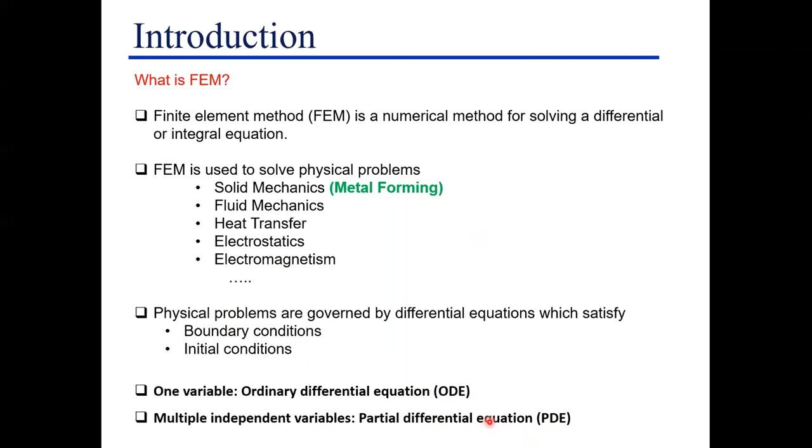Let's take an example from solid mechanics. Suppose these are beams, a system of beams, and here we need some boundary conditions. These boundary conditions along with a differential equation, called the Euler-Bernoulli beam equation. So here we need a differential equation and boundary condition, then these problems can be solved by FEM.

For example, suppose we have a rod with a variable cross-sectional area, and if you want to find the deflection at the free end, you have to solve this governing differential equation with a boundary condition, either Dirichlet or Neumann boundary conditions. We can solve this system of problems by FEM. So FEM always requires a differential equation with boundary conditions.

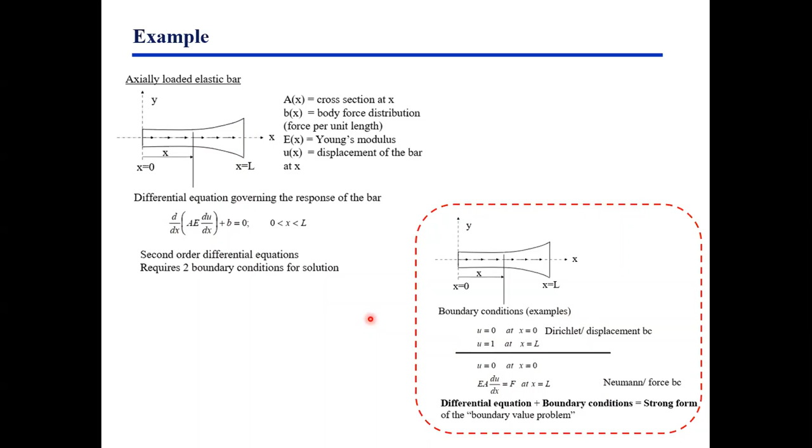Another example, suppose we have heat transfer equations. We are heating a rod at one end and interested in finding the temperature field at some point. Then from Fourier's law, we have differential equations and boundary conditions, and with the help of these boundary conditions, this differential equation is solved to find the temperatures.

So basically, the finite element method requires 6 steps: pre-processing, computing the elemental equations, assembly, applying the boundary conditions, solution, and post-processing.

The differential equations, if we have them, should be converted into elemental equations. So what is the meaning of pre-processing? The geometry is described into a number of small elements, called mesh generation. How many combination of nodes and elements, that is called mesh. So the pre-processing step is called generation of mesh.

Once you generate the mesh, then computing the elemental equations, algebraic equations are found from each element. There are 2 approaches: if the differential equation is given to us, then directly we can discretize, or direct FEM formulation is also a method to generate the algebraic equations.

Then there are a number of elements. So for assembly, you can take the number of elemental equations and add them, then apply the boundary condition, then solution, then post-processing. So these are the things.

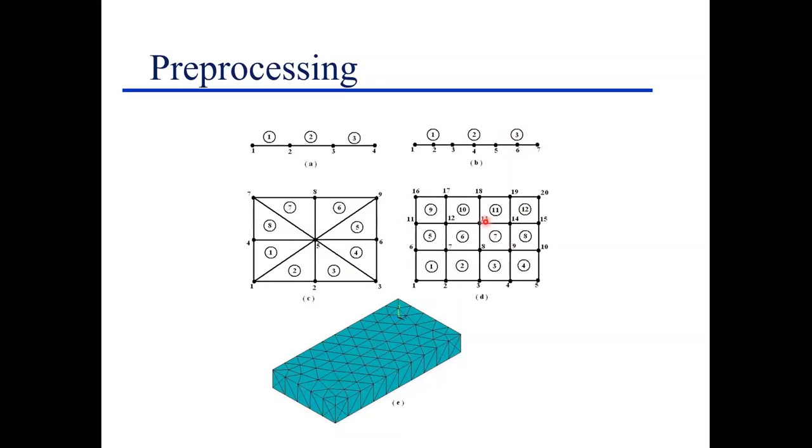In 2-dimensional, a 3-noded element is called a triangular element. And here in 2-dimensional, you can say that is a quadrilateral element because it's 4-noded. So the whole domain we have to discretize into a number of elements. This mesh is called uniform mesh because each element is uniform. And in 3-dimensional geometry, we can have a bricks element, 8-noded elements. So depending on the geometry, we can decide the elements.

Suppose we have this problem: one rod, we want to apply a load, then we're interested to find out the deflection at the free end. From strength of materials, directly you can get PL by AE, but somebody is interested to find out the deflection at an inner point.

So considering a one-dimensional problem, the whole domain is divided into 3 elements, that is 2-noded elements. So total node is 4 and 3 elements. Each element is having internal forces because Newton's third law will apply. So each force is having a tensile force as well as compressive. Based on this physics, we can develop 2 situations: one is that at each node the force acts as tensile nature, and another as compression nature.

Based on this idea, we can define these equations. First, strain, change in displacement from original displacement, that strain is converted into stress, then force. This equation can be written as a system of equations in matrix form, so we get elemental equations for the ith and jth node.

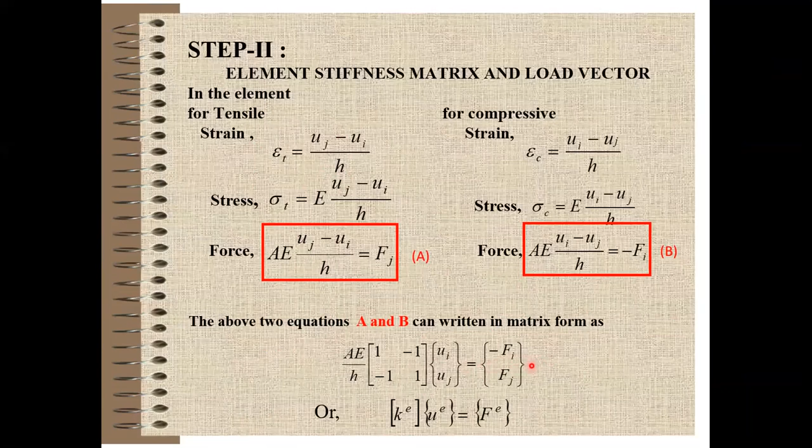In the previous problem, we divided into 3 elements. So these equations can be written for element 1, for element 2, and for element 3. Now step 3 is called assembly. We want to assemble these equations.

So how can we do this assembly? You see that we have 4 variables u1, u2, u3, u4. We can assemble these equations. This procedure is called assembly.

Once we have assembled all the elemental equations, then we can apply the boundary conditions. We know that at the fixed end, the deflection is 0, so at node u1 is equal to 0 because displacement is 0. And at node 4, we are applying a force, so F4 is equal to P. We substitute P over here, and since U1 equals 0, we perturb this, because it's an essential boundary condition.

So then we can solve this system of equations and get the nodal displacement at different points. This is the first simple process, how we go ahead with FEM. The problem here is considered as 1 degree of freedom because at each node only displacement is there.

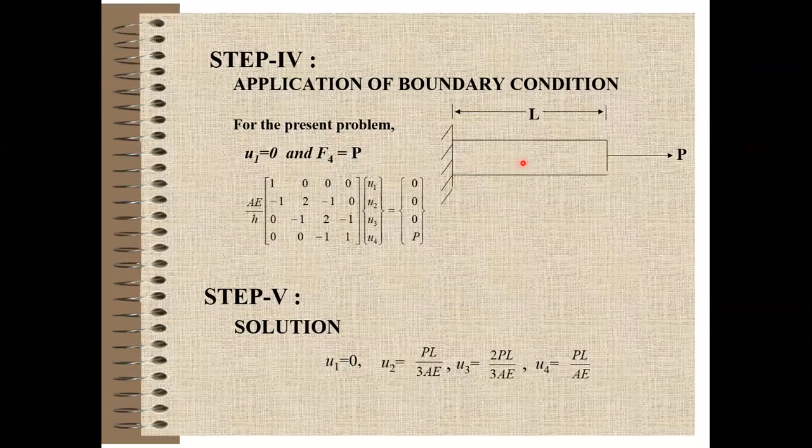If suppose then this is called post processing. Once you get a displacement, then... Sir, your voice is not audible, sir.

Now it is audible. So post processing: once displacement is got, then we find the strain, and when strain is got, by applying Hooke's law, we get the stress. This is called post processing.

So these are the 6 steps which need to be followed in the finite element method.

Suppose we take another example with a 2 degree of freedom beam, where at each node deflection as well as slope is required. This is a fixed beam. In the center, in the upward direction, we are applying a load, and we need to find out the deflection and slope at the midpoint of this beam.

In pre-processing, the whole beam is divided into a number of elements and nodes. We know that for any force in a linear elastic material, suppose this is the ith node and jth node, with a load acting, and moment and slope theta at each.

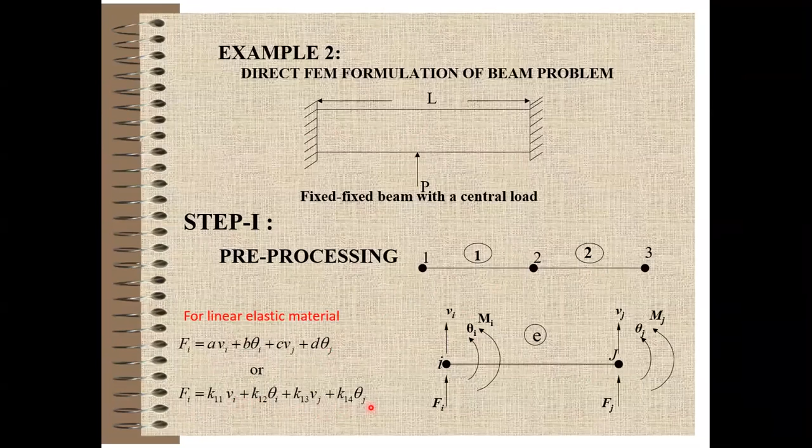So this equation, being linear, we can divide into K1 and K2 terms. Like this, Fi, Mi, Fj and Mj can be written in matrix form. Now the task is how to find out these K11, K coefficients.

Based on strength of materials relations for deflection and slope, we use these 2 equations and convert them into matrix form. Finally we get EI equal to K11, K12, K21 and K22. Similarly, the other 12 coefficients we can find out, and finally we get these equations, and this is how we obtain the stiffness matrix.

Once we obtain this, we have the global equations. We have 2 elements: for element 1 this stiffness matrix, and for element 2 this one.

Then comes assembly. Assembly means you assemble the matrices: V1 corresponds to V1 and V2 corresponds to V2. So here you see this V2, minus 12 and minus 12, and this 12, and again this 12 will come because it corresponds to V2, and in this element also this 12 corresponds to V2. So these terms will be assembled and added together.

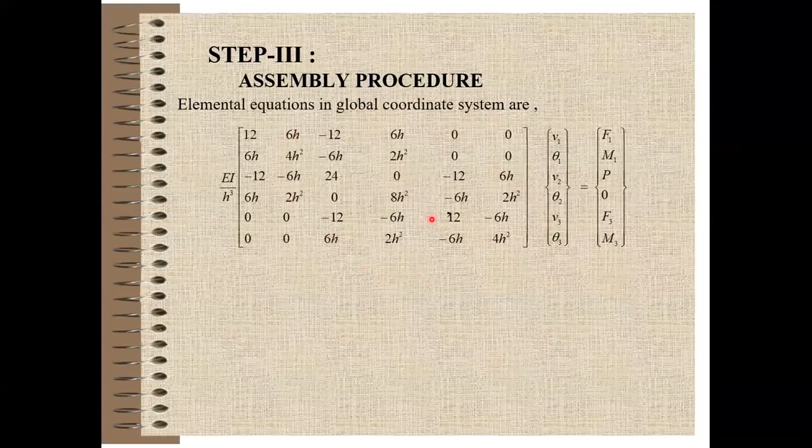Once you've done the assembly, your stiffness matrix looks like this. Then you go for applying the boundary conditions. We know this is a fixed beam, so slope and deflection at both ends are 0, meaning V1, theta1, V3, and theta3 are known, and only V2 and theta2 are unknown.

So in the previous equation, you can simplify it, and this equation reduces to this matrix. Then we can solve easily to find out V2 and theta2. This is the procedure for direct FEM methods.

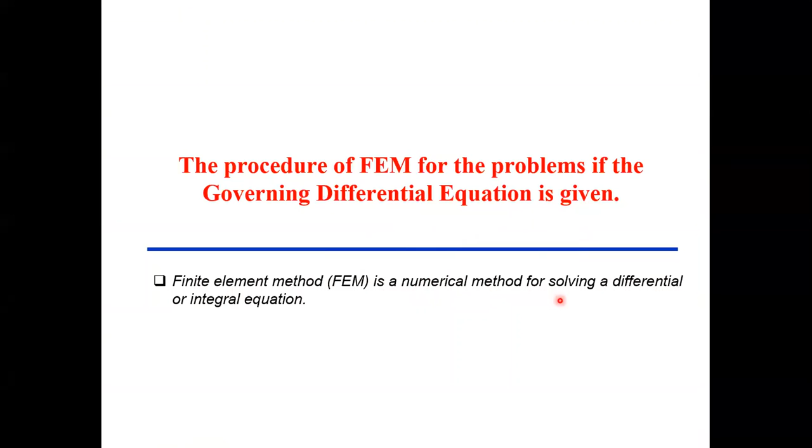Now, in this method we don't have differential equations, but whenever we follow the procedure of FEM for problems where a governing differential equation is given, we know that FEM is a numerical method for solving differential equations. So any differential equation should be converted into a variational form, which is then approximated using the finite element method. This is the basic foundation of FEM.

Now, how do we define the variational form? Let us consider this differential equation: heat conduction in a rod in one dimension, without heat generation, governed by this differential equation. In step 1, we apply this variational technique. So variational method is applied to obtain the variational form: step 1 is this, then step 2 integrate by parts, then step 3 apply the calculus of variation.

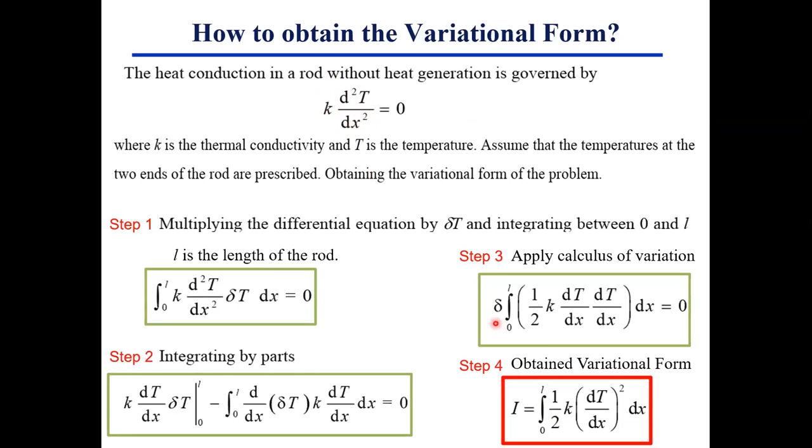Finally, you obtain the variational form in step 4. So whatever differential equation is given, we directly obtain the variational form this way, by applying the calculus of variation to get the variational form.

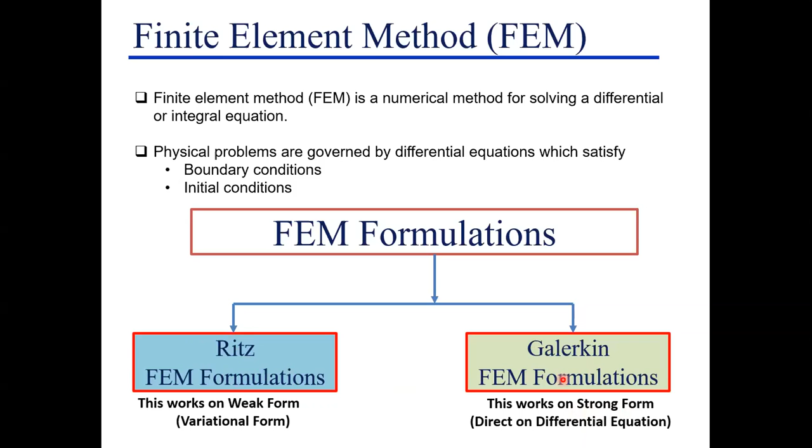In FEM formulations, there are two types: Ritz FEM formulation and Galerkin FEM formulation. Ritz formulation directly works on variational form. If a problem has a variational form, we apply Ritz FEM. If a differential equation is given and you don't want to derive the variational form, you apply Galerkin FEM. So depending on choice or simplicity, we can employ both formulations.

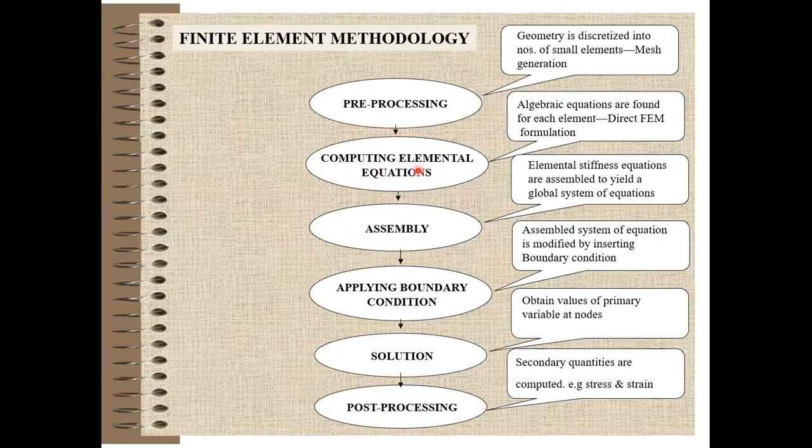These are the basic procedures followed in FEM: pre-processing, computing elemental equations, assembly, applying boundary conditions, solution, then post-processing. Here we focus on computing the elemental equation; the rest of the procedure remains the same, starting from this variational form.

Now you can express u as n1u1, n2u2, and so on for an n-noded element. Then substitute this expression into du/dx to differentiate n1, where n1 equals 1 minus x/h, so n,x equals dN/dx. Substitute these values into the variational form, then differentiate with respect to nodal values to extremize it.

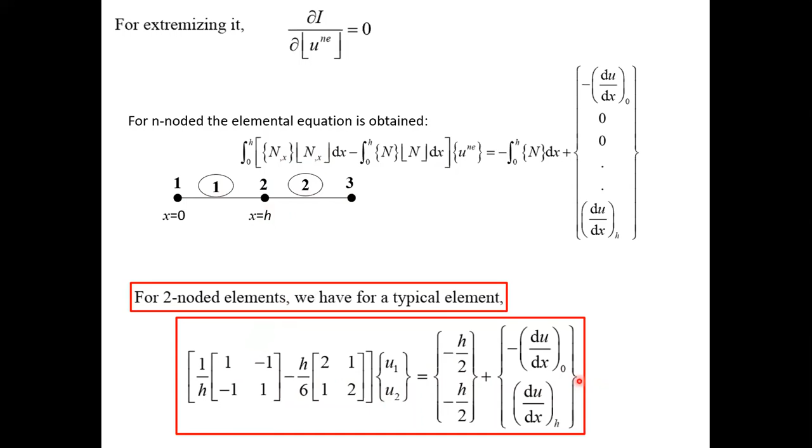Suppose you have two elements with nodes 1, 2, and 3; the problem can be divided like this, giving elemental equations for each element. Then we do assembly, apply the boundary conditions, and get a solution. Here assembly is done, then we apply the boundary condition u1 equals 0, and from the essential boundary condition we get displacements u2 and u3.

This is called Ritz FEM formulation.

What about Galerkin FEM formulation? Here the differential equation is made with RHS equal to 0, and the LHS is termed the residual. The residual is multiplied by a weight function, then integration by parts gives a weak form. Then we assume some function that has completeness based on the shape function, and then we apply the boundary conditions. This is the basic procedure for Galerkin FEM formulation.

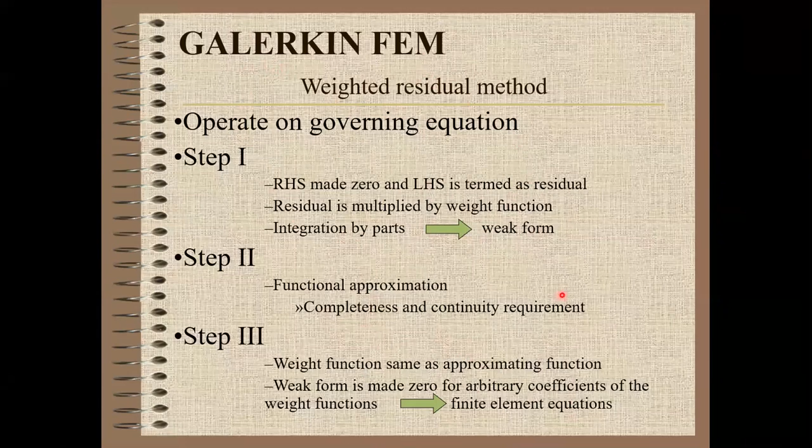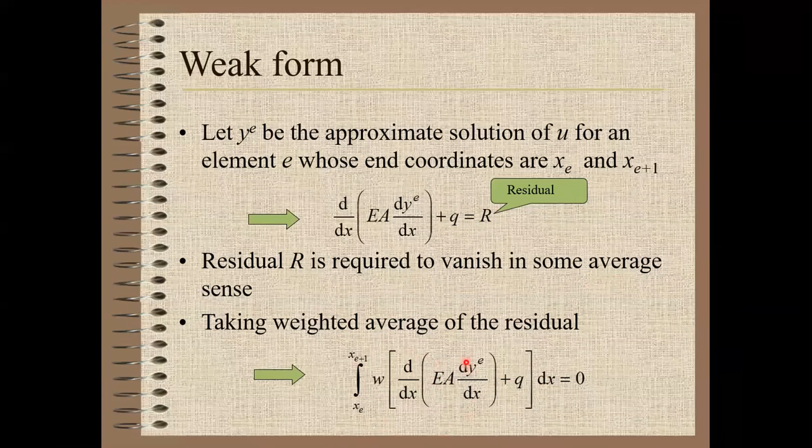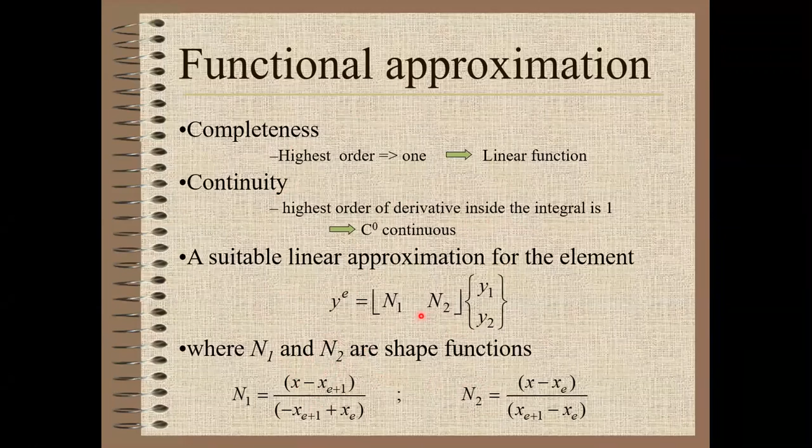We assume some function w, where w is expressed like y: y equals n1y1 plus n2y2, and similarly for w, which are called weights. We check completeness and continuity, whether the highest order derivative inside the integral is 1 or not, then put the shape functions n1 and n2. This is the approximate function, which we then substitute into the variational form.

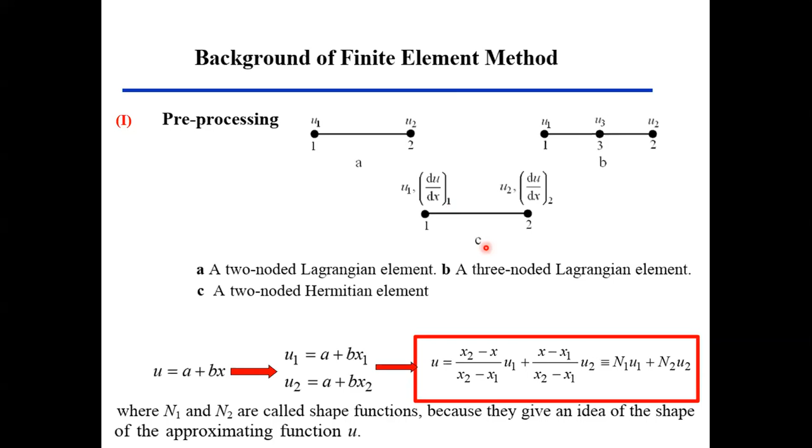Then developing the elemental equations. This is called the differential equation, and this differential equation is made into a residual in Galerkin FEM. Then assembly procedure, develop elemental equation, then assembly procedure depending on the geometry, finally you get this stiffness matrix. Then you can apply the boundary conditions, solving the system of equations. This K matrix is called stiffness matrix, applying this vector is called boundary condition, and this is nodal displacement, and we can do post processing. This is the basic requirement in FEM finite element analysis.

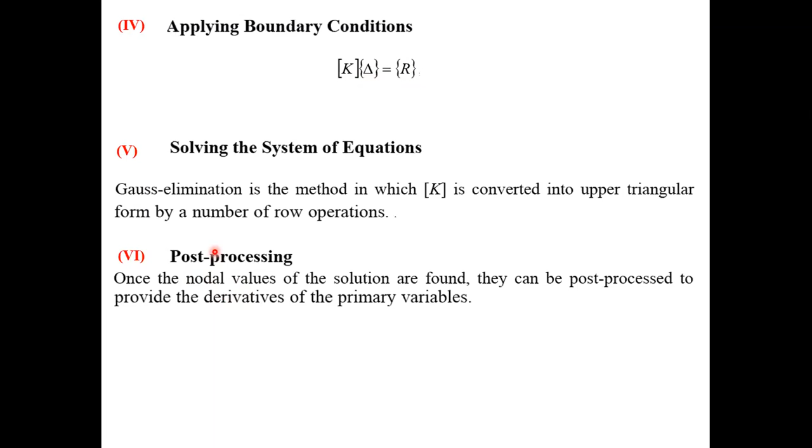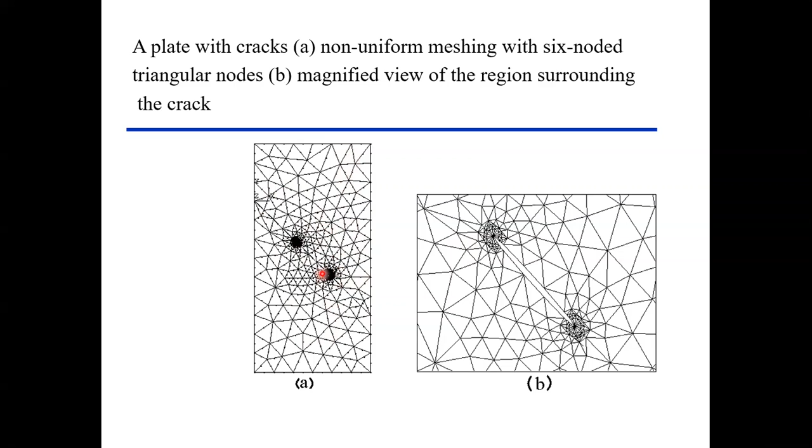And here also some crack problem is there. Suppose here this is the dot, here the coarse mesh is there, this is called fine mesh. Like that, it is fine mesh, coarse mesh element, depending on the situations.

So now come to the application of finite element analysis in metal forming processes. What are the metal forming processes? Processes that cause the change in the shape of the solid metal parts by plastic deformation, or you can say permanent deformations, are termed as metal forming processes.

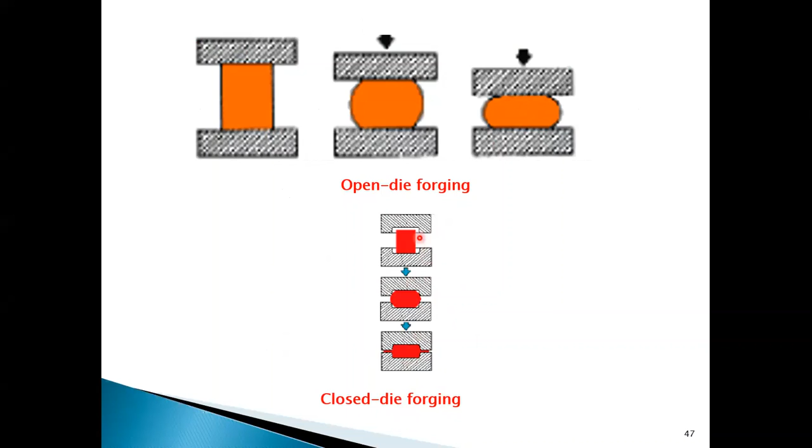You can see open die forging, where this is the material, this is the die, we can apply a load, the material is deforming. So how much stress distribution is there? Similarly, for closed die forging also, we can see like that.

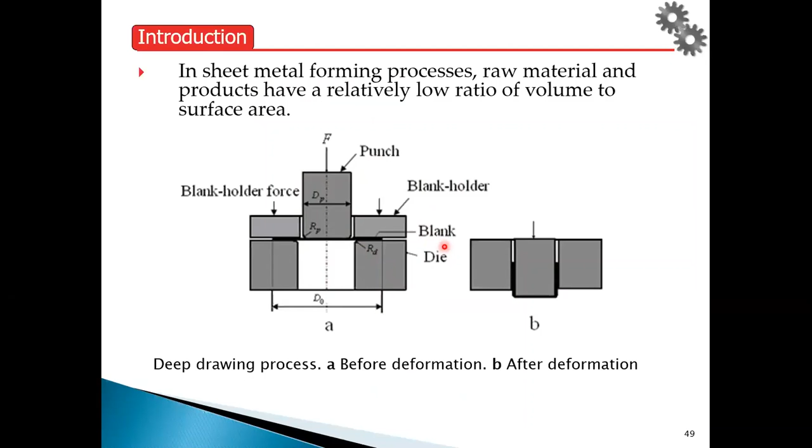So without applying mechanical forces, and without the friction effect being very much dominant, by neglecting the friction effect, this laser forming process is also very much useful, and this process is very promising to deform this sheet.

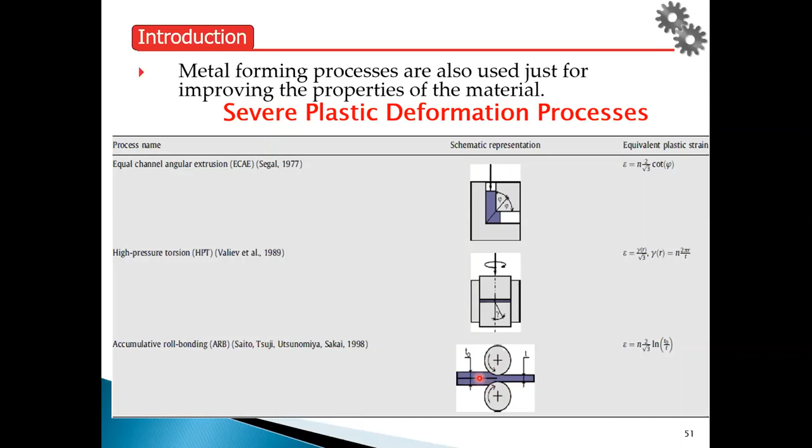By this way, the mechanical properties of the material can change, just by changing the shape and size. High pressure torsion is also one method you can apply to enhance mechanical properties. Then there's the accumulative roll bonding process, ARB process, where you take two sheets and roll them together. This also increases the mechanical properties of the sheet, so sometimes this process is also called that.

But what is the purpose of modeling of metal forming process? Why are we talking about this modeling? There are different things: power requirement, how much power is required; pressure in the die and tools, how much pressure will be required; stresses, strain distribution, strain rate distribution in the material during processing, because this is a flow formulation process. So what is the strain, how about the development of strain rate and stresses.

Then residual stress in the product. Residual stresses are those stresses where, when you apply a load and then remove the load, some stresses remain within the material, and those stresses are called residual stresses. So this plays a very important role.

Then defects - what type of defects? There are different types of defects that occur in metal forming process: geometric accuracy, surface integrity, mechanical and metallurgical properties, and microstructure. So these properties are the purpose of why we need modeling of metal forming processes.

So just pre-FEM techniques - there are 4 or 5 methods which are also useful. The slab method: in this method, we basically consider a force equilibrium approach to find out the pressure. Some slab is considered, and we apply the force equilibrium approach, developing a differential equation. This differential equation gets solved by FEM. Thereby, the slab method is also used in finite element analysis.

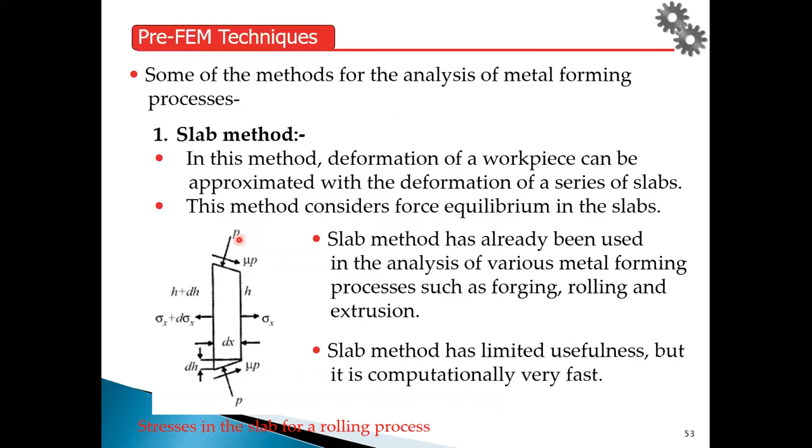Slip-line field method is also required. This method is particularly used for rigid plastic material, where the material behaves only like a rigid plastic. So when yield criteria is there - since metal forming involves plastic deformation - there are 2 criteria: one is Tresca and one is von Mises criteria.

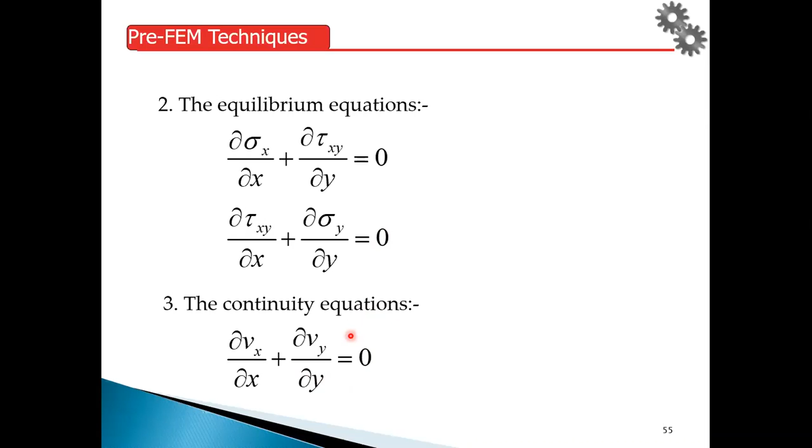This equation is satisfied, and by this equation we get the stress distribution. Then we apply the equilibrium equations, and this equilibrium equation is a differential equation. In FEM, we want this differential equation so we can solve it. And this is the continuity equation, because the volume of material remains constant in the metal forming process. So these continuity equations are there, and these are the equations we can solve using FEM.

So there are a total of 5 unknowns and we have 5 equations, so we can solve it by FEM. By applying FEM, we get a stress distribution in the metal forming process. In any forming process where the material is deforming, we get a stress and velocity field, Vx and Vy.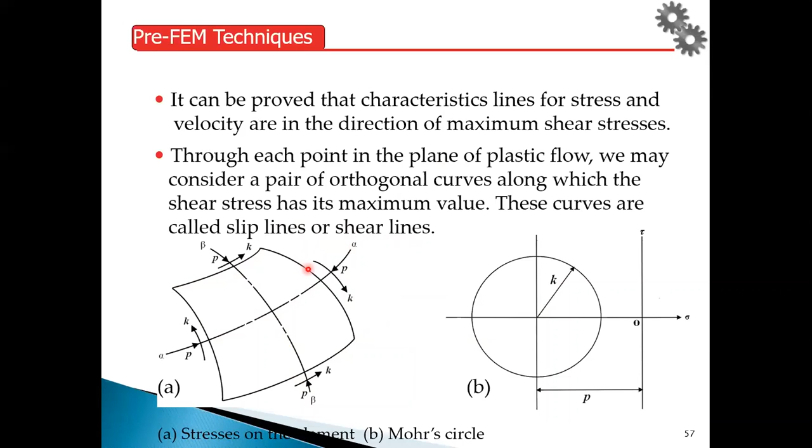This is a simple insight: in slip-line field theory, we assume some Mohr circle applies, because this method is applied for plane strain condition only. So alpha lines and beta lines are both orthogonal to how the material is behaved - the material is deforming by a shear plane. That's why they are called shear lines; the material is always deforming along a shear plane.

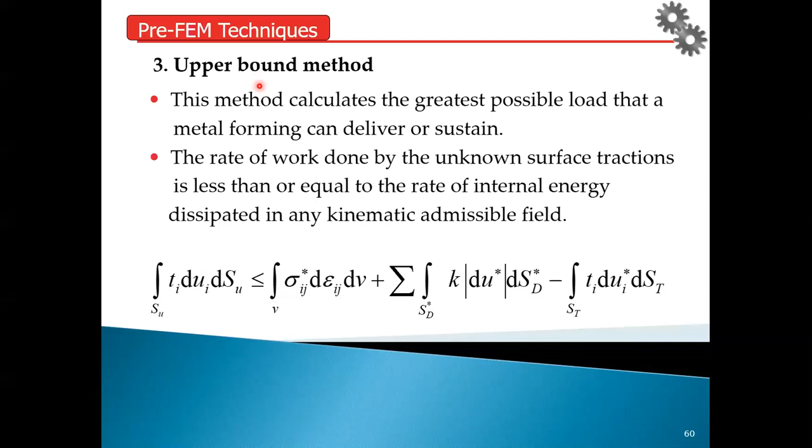Another method is called the upper bound method. Generally in the upper bound method, suppose we want to deform some material, then how much force is required? The upper bound method gives you the maximum force required based on a kinematically admissible field - the rate of work done by the unknown surface traction is less than or equal to the rate of internal energy. So the upper bound method gives you the maximum force required to deform the material.

The lower bound method is just the opposite. It says how much minimum force is required to deform the material. Meaning, if somebody says I want to deform this much material, applying the lower bound will tell you, okay, a minimum of 10 Newton force you want to apply. So the lower bound method says the minimum 10 Newton force is required for material deformation to take place. So these are the two methods, but the upper bound method is most popular in metal forming process.

Then there's also the visioplasticity method, which combines experiment and analysis both - you can find the velocity field through photographs by performing some experiments.

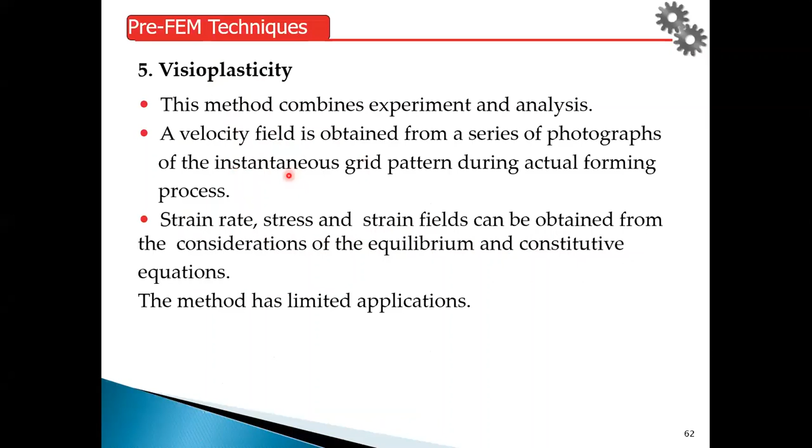Based on this information, we can find out the stress and strain field or strain rate fields from the considered equilibrium and constitutive equation. This method is called combination of experiments and theoretical, and this is also called visioplasticity.

Process dependent and material properties and different friction models. One is called Lagrangian formulation. Lagrangian formulation represents a more natural and effective approach.

Another formulation is called Eulerian formulation. Eulerian formulation is basically a constant volume process. In Eulerian formulation, for structural problems with large displacement, new control volumes have to be created because the boundaries of the solid change continuously. So the nonlinearities in the convective acceleration terms are difficult to deal with, and sometimes Lagrangian formulations are more natural to apply.

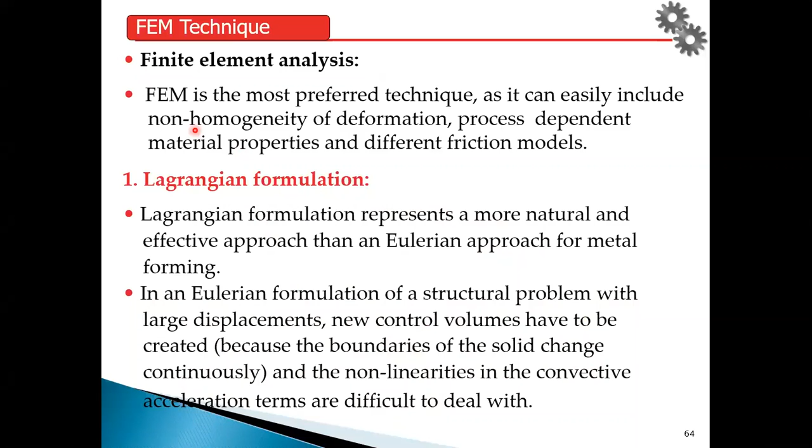Likewise, this is updated Lagrangian formulation. For example, this car is moving - we always focus that the car is moving from one distance to another. Similarly, whenever material is deforming, we always think of some particle and how this particle is moving. So in this way, updated Lagrangian formulation works.

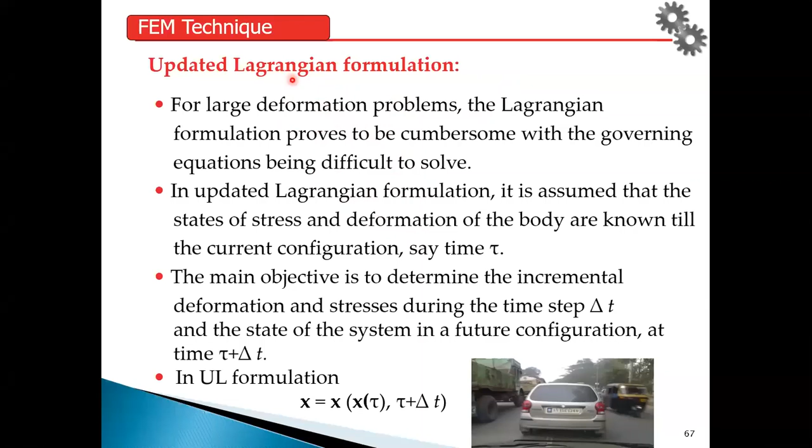But on the other hand, in Eulerian formulation, we have to focus like a bridge. We always focus on the bridge, and the bridge is static - whoever is coming on the bridge, we are not bothering about, we are just always focused on the bridge. This type of approach is used in Eulerian formulation.

In this formulation, the primary unknown variables from finite element analysis are the velocities, hydrostatic pressure at different locations called nodes, because every geometry is discretized into a number of nodes. So here this is the strain rate relation and velocity gradient, and this is the Levi-Mises plastic flow relation.

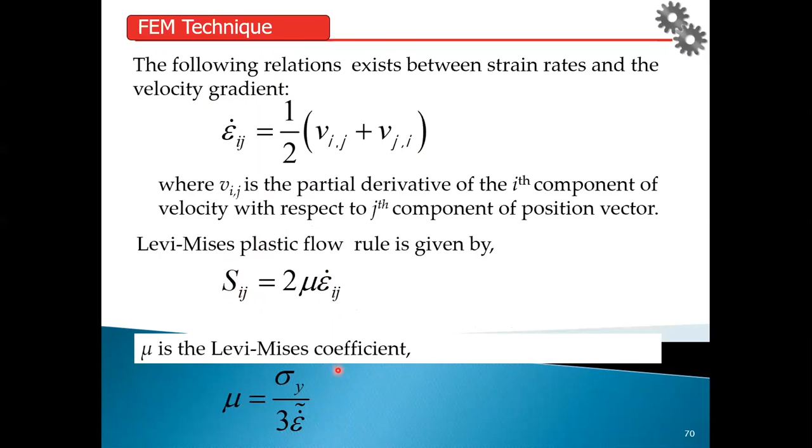Because every stress is converted into hydrostatic stress and deviatoric stresses - these are the deviatoric stresses. Then the Levi-Mises coefficient, and this is called sigma y. Sigma y, you can define by some material model - this is the flow stress, and this is how we find the equivalent strain.

Now, here are the continuity equations and equilibrium equations. This is the continuity equation, this is the equilibrium equations here, where P is the hydrostatic pressure. These equations are similar to the Navier-Stokes equation, because in fluid mechanics the fluid is flowing, and here the material is flowing. So many researchers attempt to solve these equations for different metal forming processes using Galerkin formulation.

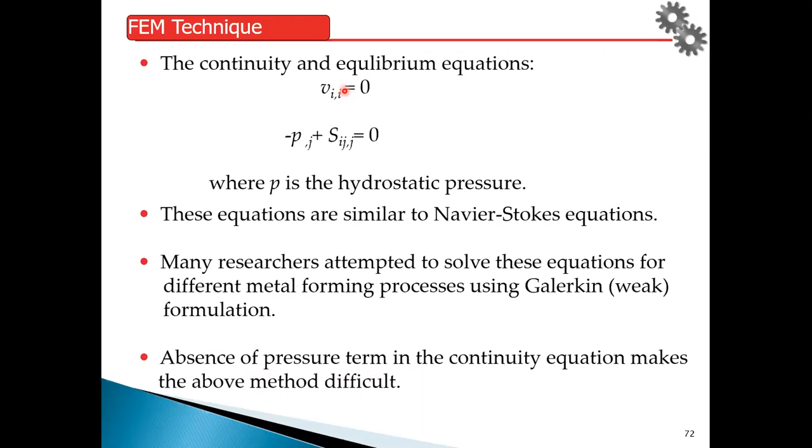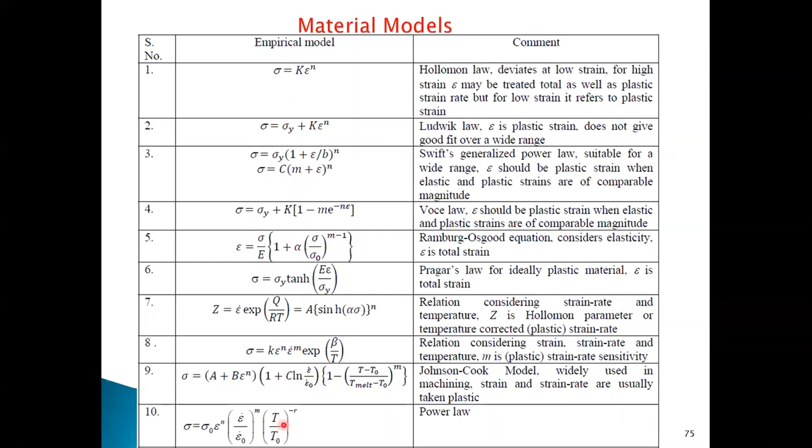So depending on our requirement, we can apply this material model in the equation. Now we want to solve this system of equations with the help of the finite element method. How can we solve it? We need a weak formulation because we are solving using Galerkin FEM formulation.

So each equation we divide and make a weak formulation, then solve it by applying it to the whole geometry. Since we are considering the strip, in this problem we are not considering the roll, only the strip is considered. This is the deformation zone CD, and here you can also see CD and E.

Due to symmetry, the upper half portion is considered, and a total of 56 elements have been taken. This geometry is divided into 4-noded quadrilateral elements. Then here a 9-noded element is taken, so we have shape functions n1, n2 up to n9. So the approximation of vx and vy, since this is a two-dimensional problem.

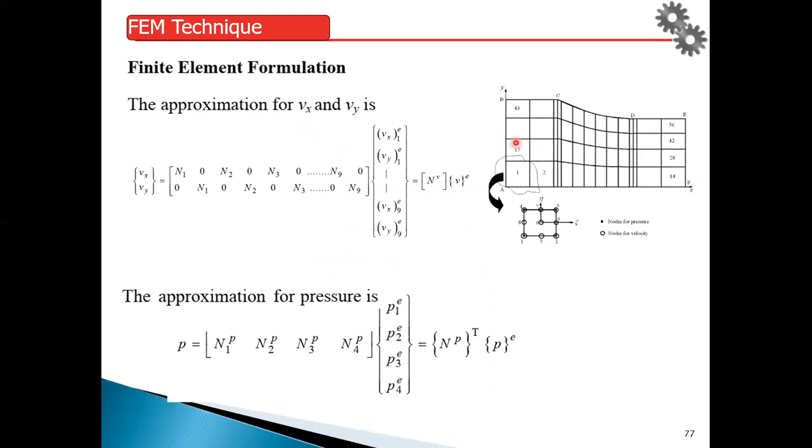vx is the velocity field in the x direction and vy is the velocity in the y direction, defined at these nodes. For pressure, we use a 4-noded element, so N1p, N2p for pressure. These are the approximate pressure and velocity formulations we considered, and we solve this problem by FEM.

On the entry AB, only velocity is moving in this steady state rolling process, so vx is equal to U1 and vy is equal to 0, because the strip is not moving in the upper direction, only moving horizontally, longitudinally. Similarly, on the exit boundary DE, vx is equal to U2 equals U1 over 1 minus r, this relation comes from the geometry of the rolling process, and vy is equal to 0.

Likewise, for the different regions AB, BC, CD, DE, EF and FA, all the boundary conditions have to be mentioned depending on the physics of the problem, and details are given in this paper. At the interface BC, the strip and roll are in contact and the strip is moving. In this figure, CD, here is BC which we represent.

Here friction is present. How can we tackle this friction? The boundary condition is vy plus vx tan phi equal to 0, where phi is the contact angle at this region. So these are the boundary conditions.

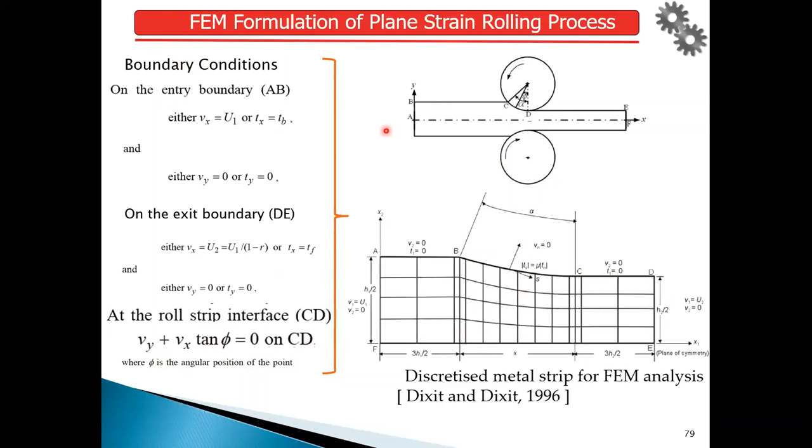We apply these differential equations and get a solution. Suppose you want to know how much roll torque is required, then power required for plastic deformation, power required for overcoming friction at the roll interface, power required due to tension, if you are applying tension, and the roll force. Once you do the FEM analysis, this is called post processing.

So nodal solutions are obtained, and then you can apply those solutions. Finally, some typical results we obtained for roll force and roll torque were compared with this paper, and the results are given, so we can obtain the roll force and roll torque. Then one important point: numerical aspects are very important.

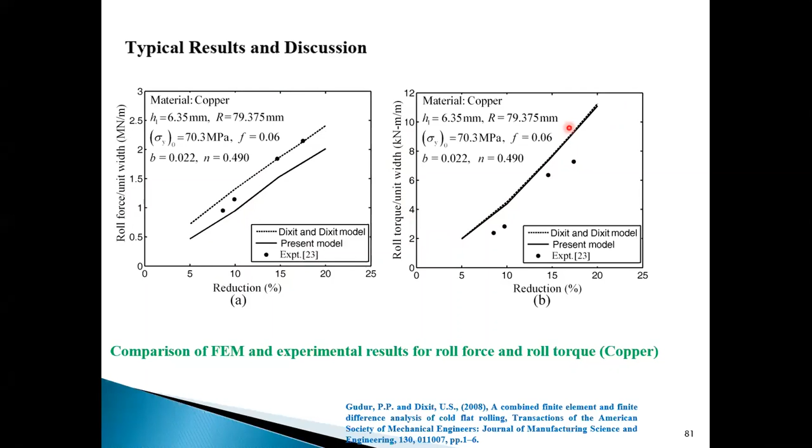Roll torque per unit width is always increasing, as in this figure. Experimentally also it is observed that when you increase the reduction, the roll torque increases in this fashion. But in this particular paper, they have reported it differently, and this is due to numerical aspects. So it is very important, when doing an FEM analysis, to consider numerical aspects carefully, otherwise your results will be wrong. This is also very important.

Once you get into the deformation zone, we get a stress distribution. This is the advantage of the FEM method. We get a deformation zone, and in this deformation zone we get stress contour plots showing the stress distribution at different strain rate contours at different regions within the deformation zone.

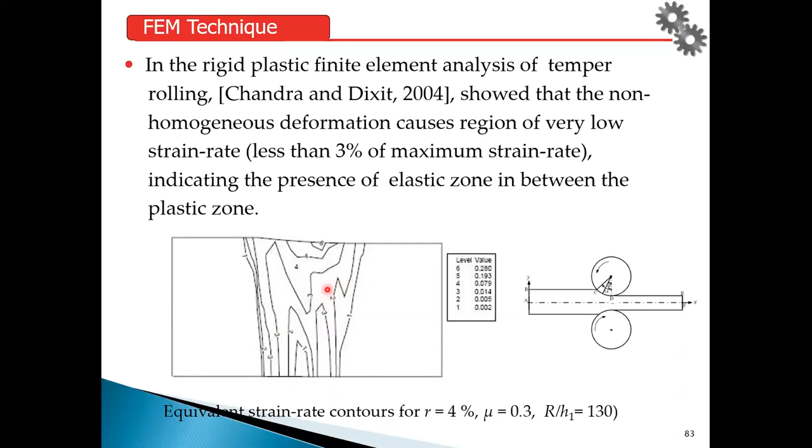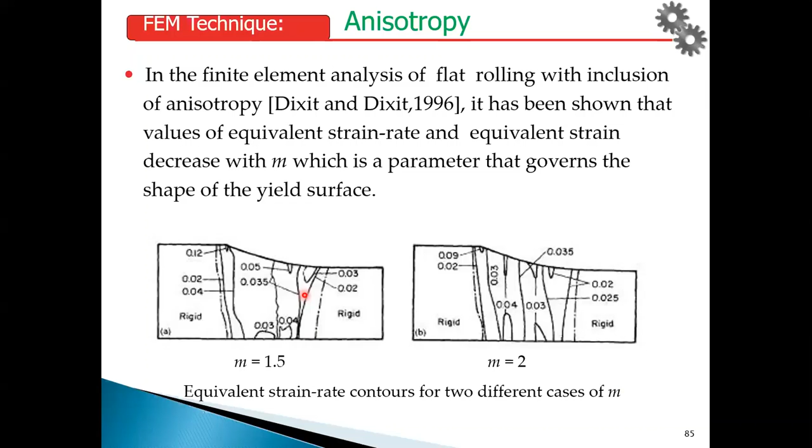Now, till now we have not talked about temperature dependency. If we include temperature dependency, we call it thermal modeling of the process. When the strip is there with the roller, due to symmetry we show only the upper part. As the material deforms, heat is generated because internal energy is converted into heat energy, and this heat hits the roll surface, creating a thermal gradient effect.

Proper thermomechanical modeling is very important when we talk about the rolling process. The deformation is based on Eulerian flow formulation, requiring a friction model, constitutive relations for flow stresses - we've seen different models - and thermal parameters like thermal conductivity and specific heat, since temperature is involved. This gives a complete overview of how we approach thermomechanical deformation using FEM, Abaqus, or analytical methods.

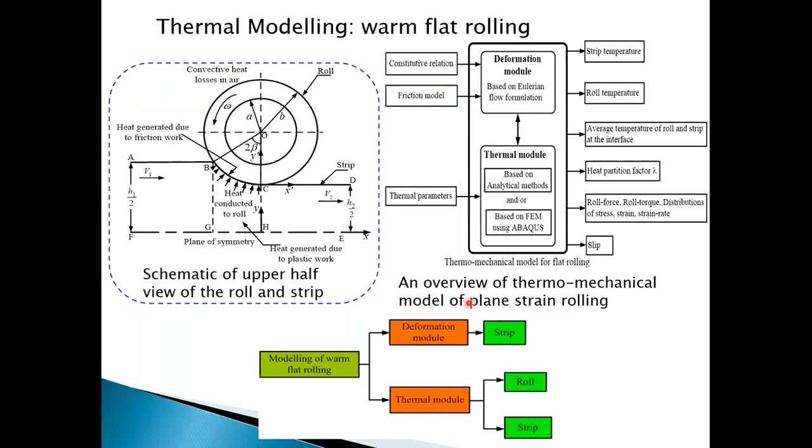Based on that, someone was also interested to find out thermal properties - how can we find these thermal properties, given that deformation is involved? There's a methodology you can find in this paper, which is part of my PhD work. The main concern is: suppose the rolling process is going on, we do thermomechanical analysis by FEM and put a temperature sensor at two locations.

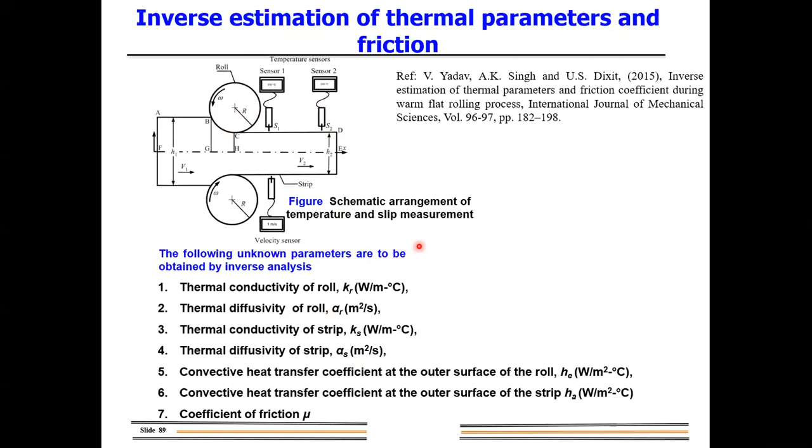Based on this temperature sensor feedback system, thermal properties can be measured without conducting experiments in a laboratory. The methodology proposed in this paper successfully demonstrates how to determine the conductivity of the roll and strip, the convective heat transfer coefficient - how much cooling occurs at the outer and inner surface of the roll, since the roll is considered hollow - and the coefficient of friction. To do this, we perform a numerical parametric study: at sensor 1 location and sensor 2 location, we observe how the temperature profile changes by varying the thermal conductivity of the roll, and then by varying alpha.

Alpha is equal to thermal diffusivity of the material. Here alpha is changing, the pattern of the temperature distribution changes when you change the thermal conductivity. This idea gives a clue that there is a unique solution, then how we can go ahead.

So we have changed thermal conductivity of a strip. You can see here, whenever strip thermal conductivity is changing, the profile is changing. But when we talk about KR, the thermal conductivity of the roll, you see over this. This is a very interesting result.

Based on these results, we have developed a methodology to find out the thermal conductivity of roll, thermal parameters, friction coefficient, without performing the experimental test. That's why modeling is very much essential, it reduces the experimental efforts.

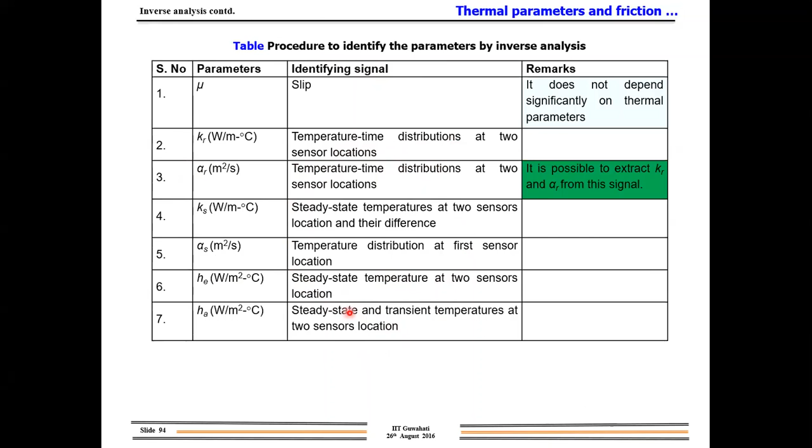So these are the results. Then based on the parametric study, we identify these parameters, this is the observation we noted. And this table will guide you to develop the feedback control system in the rolling process.

Suppose you have a direct model, that modeling, and you guess the initial value of properties, friction, and you want to perform the experiments. By performing some experiments, we want to measure the temperature and slip. By direct model also, we get some values.

So you see here, the error is measured between the computed and prescribed value. Prescribed means this is less than 1. If so, then yes, otherwise no, then update the properties using an optimization algorithm like this. This procedure is repeated, and finally we record the mechanical properties and friction, then stop. So this is the methodology which has been developed and demonstrated.

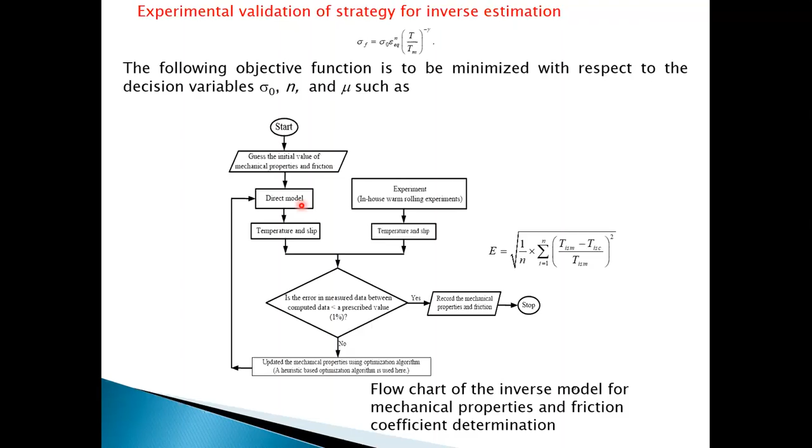Sometimes when we talk about computational time, people ask how much time is required for computation, and how we can reduce this computational time. So here some hybrid technology can be applied, some artificial neural network coupled with FEM, a trained neural network.

So the FEM model gives the velocity field, location of the neutral point, then a trained neural network NN model. The NN model provides the velocity field and it is very fast, then the FEM model finds the roll force, roll torque, etc. So this hybrid method is also useful to reduce the computational time.

I want to demonstrate, till now what we have discussed is how we can do the finite element analysis by doing coding, meaning we can do the formulation, then write the code in MATLAB or Fortran or C++, any platform, then you can get the results.

But nowadays most companies have ready-made software available that we can use, like ANSYS, you might have heard, then Abaqus. But behind Abaqus, what is going on? This mathematics is going on. But these software are mainly used via GUI, graphical user interface.

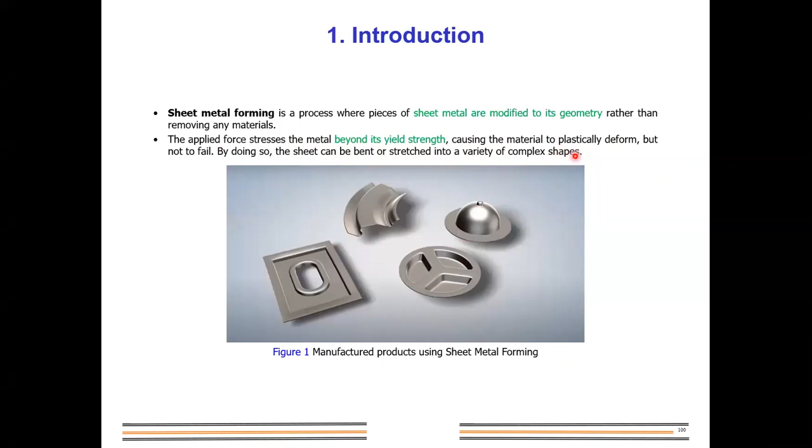The applied forces stress the metal beyond its yield strength, causing the material to plastically deform, but not fail. By doing so, the sheet can be bent or stretched into a variety of complex shapes. So in sheet metal forming, we need to go for bending, roll forming, spinning, deep drawing, stretch forming.

Suppose your metal is getting deformed into this shape. You can apply this arrangement, a process called stretch forming. Take a sheet and apply a tensile force in between, and the sheet gets stretched.

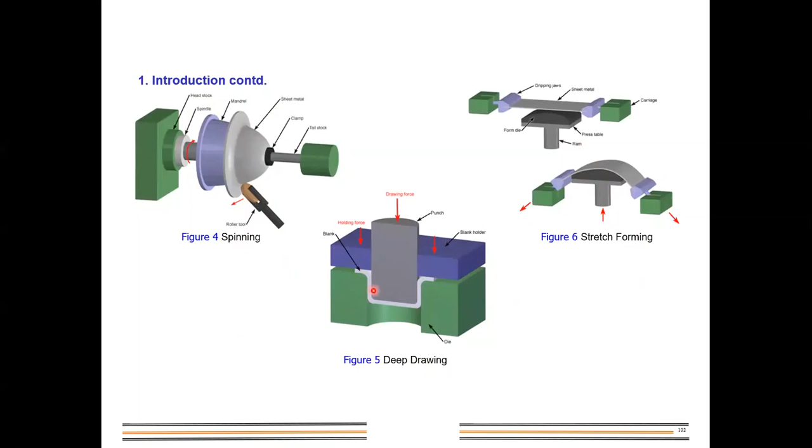In deep drawing process, we have a blank and a blank holder providing holding force. We apply a punch and this sheet will be deforming. So in this process also the sheet will be deformed. Let us take the deep drawing process.

Deep drawing is a metal forming process in which sheet metal is stretched into a desired part or shape. Here we apply forces, and different zones are there with different stresses. Stress at different locations in the deep drawing process. So how much, and where will the effect be? How can we find out?

In finite element method, this is done on Abaqus. Suppose initially you consider the sheet using these dimensions: thickness, width, length. Then this is the punch and the final shape of your sheet. We want to see this much C shape bending, for any material, say titanium material.

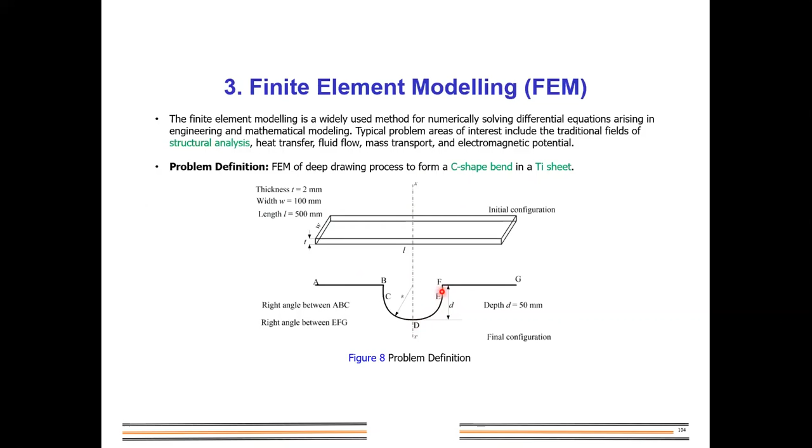Due to symmetry, only this part needs to be considered, so this part you can construct. This sheet, then punch, then blank holder you can define in Abaqus, and material model is this much. Temperature dependency can also be included, with theta, strain rate, and strain using the Johnson-Cook material model. These constants are from different papers, and we apply finite element analysis, inputting geometry and material properties, then see how this material deforms.

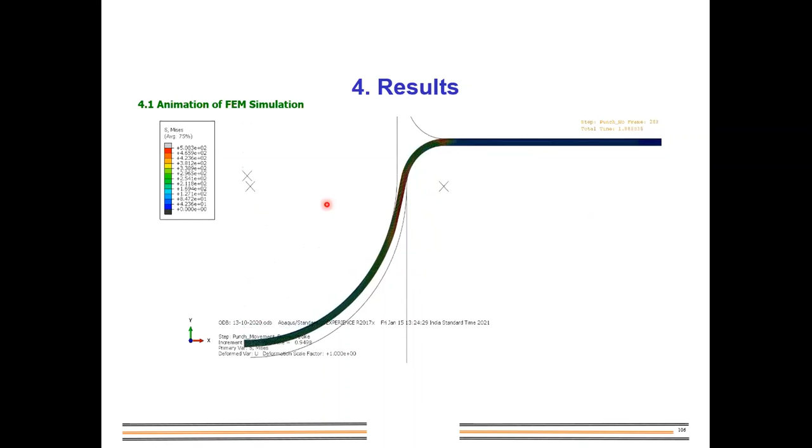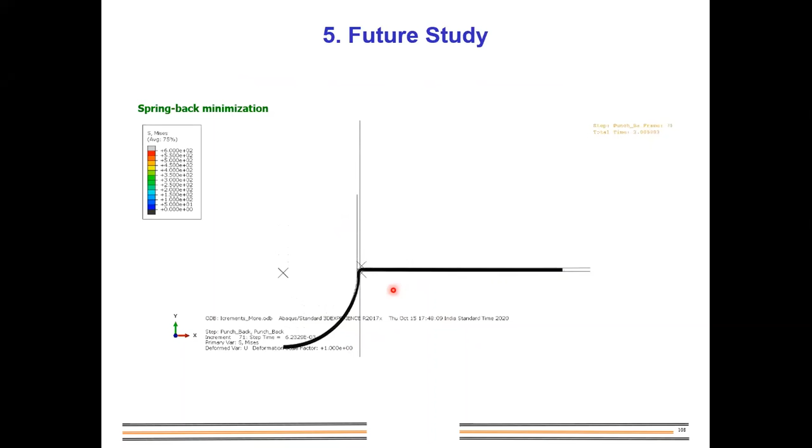One observation obtained is spring back minimization. Once you apply a load, the sheet is forming, and when you remove the load, you can see some spring back effect will be there, which should be minimized. See this much spring back effect, and likewise you can see more.

Here 3D FEM also considers the deep drawing process as 2D. So this is the deep drawing process we have done. Apply a load, and you get this shape finally.

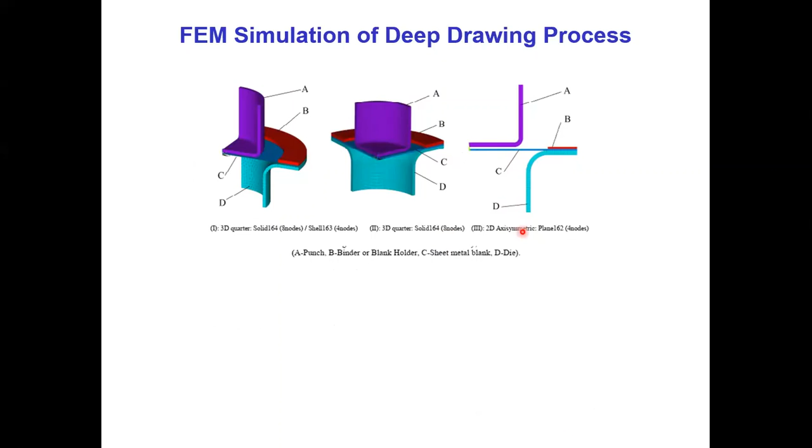In another work, we considered these geometric parameters and material properties, assuming plane strain condition. This is the sheet, this is the punch, this is the blank holder. Applying it as a 2D axisymmetric problem, this sheet, the cup part, will be deformed. You can see the stress distribution at different times and different depths, plotted as contour plots and graphs obtained by the software.

So this is the way we can do it. We don't need that much mathematics, because the mathematics part is done by software. But we want to know how to use these software techniques, so that much accuracy is also important.

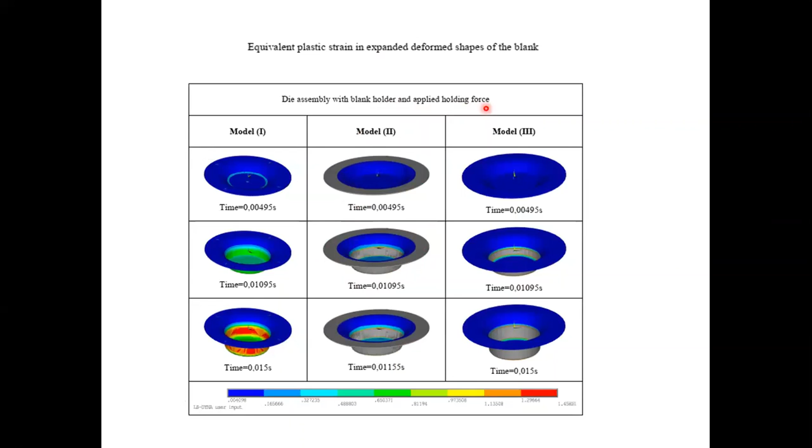See, this is another problem, equivalent to one I've taken from a paper on cup forming we have done. These are the stress distributions for the die assembly with blank holder and applied holding force at different times.

Now another part, discussed earlier, is that nowadays metal forming processes are advancing. Advanced metal forming process is called laser forming or laser bending process, because we don't want to use tool and workpiece contact, since whenever deformation occurs, the tool contacts the workpiece, causing friction. If we eliminate this friction, we can reduce forces drastically.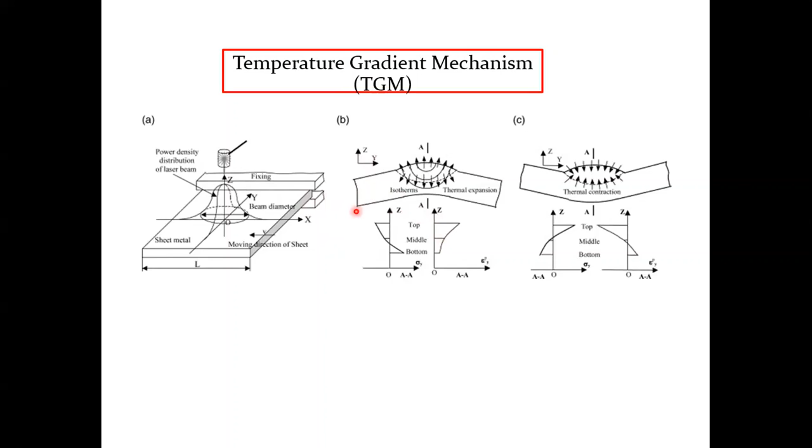But in general, in laser bending, TGM is more dominating if you select the geometric parameters such that temperature gradient mechanism takes place. Depending on the sheet - if you have a thick sheet, then upsetting mechanism occurs. If you have a large laser beam diameter, then it's a buckling mechanism. So these are the three mechanisms possible in the laser forming process.

In laser forming, the laser moves from one end to another end and you get a certain bend angle. This includes bending, forming, shortening, and thickening by laser irradiation. Tools, dies and presses are not required - this is very significant in metal forming, since conventional metal forming always requires tools and dies. But here, no - sheet plates, foils, pipes can be processed. Pipes can also be bent by applying a laser heat source. So suitable materials include metals, and also non-metals like ceramics, composites, and polymers, etc.

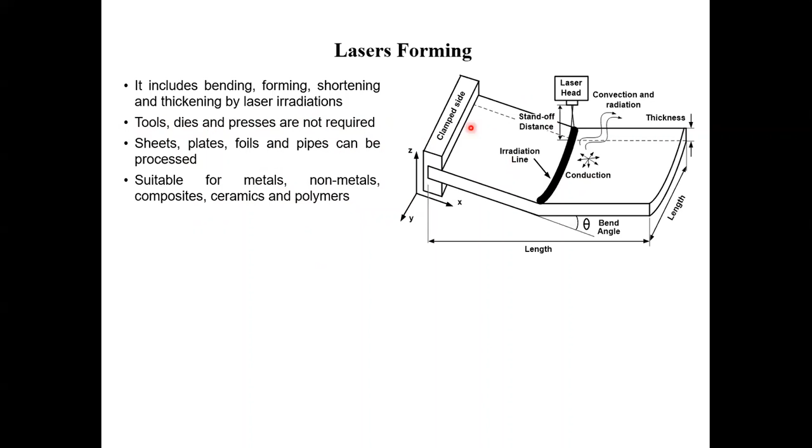The advantage is that spring back effect is not there - but we have seen in the deep drawing process that spring back effect is there, so we can minimize the spring back effect by using this process. Complex shapes can be easily formed in inaccessible areas. Accurate microforming - if you want to deform less than 1 mm, then microforming can be done. Expensive hard tooling is not required. It's energy efficient due to localized heating, gives good control, and allows processing of brittle materials. But the disadvantage is small deformation per pass, so the process is slow. So there's also a scope for how to make this process more efficient.

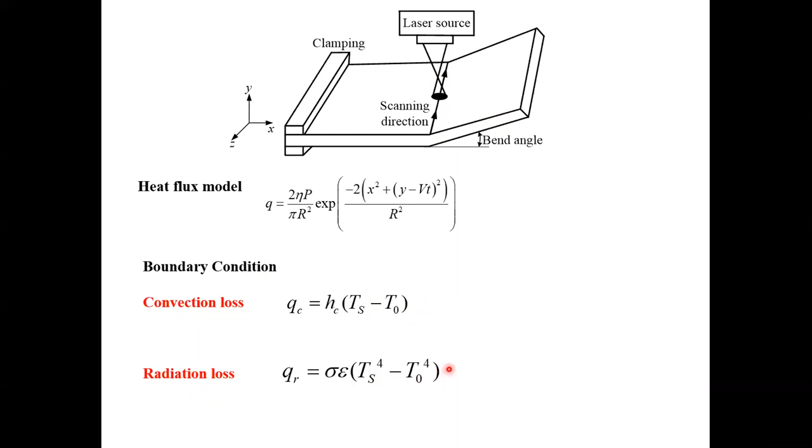Then, whenever heating occurs, cooling is also taking place. So convection loss can be accounted for by this equation, and radiation loss can be accounted for by these equations.

When you apply a load, the laser process parameters are: laser power, scan speed - at what speed the laser head will move - beam geometry, meaning the radius or diameter of the laser beam, and material parameters such as absorption coefficient, thermal properties, mechanical properties, and likewise geometry and external constraints such as clamping. These are the process parameters of laser forming and the parameters affecting the laser forming process.

Suppose this is done by ANSYS, some FEM software - this is the sheet, we can divide it into a number of elements. This is the local cylindrical coordinate system where we want to apply a heat source, and we should clamp it on one side. This is the element model, and this is the material model. For shipbuilding, material model D36 is considered, and we have given temperature-dependent properties.

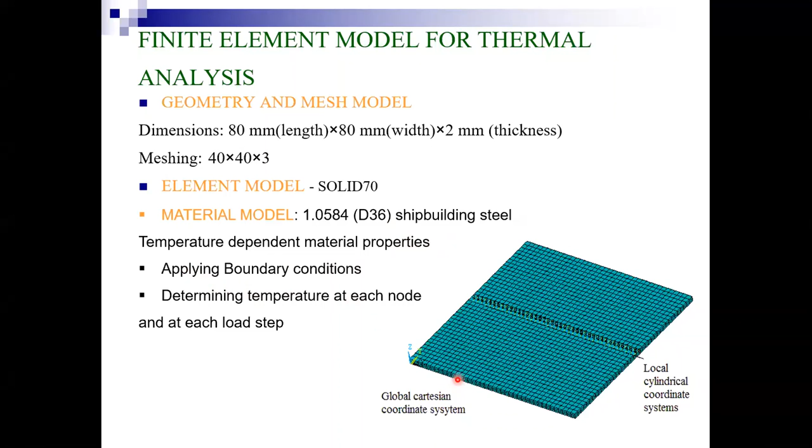Apply the boundary condition, determine the temperature at each node, and you can see over here. This is the clamp and yield criteria we consider. Then apply the heat source.

So there are things you can do with your own coding, or if you want to use software, then you have to apply these steps by steps. Then only the final results we can obtain. See, finally the sheet, the temperature we obtain, these are the sheets.

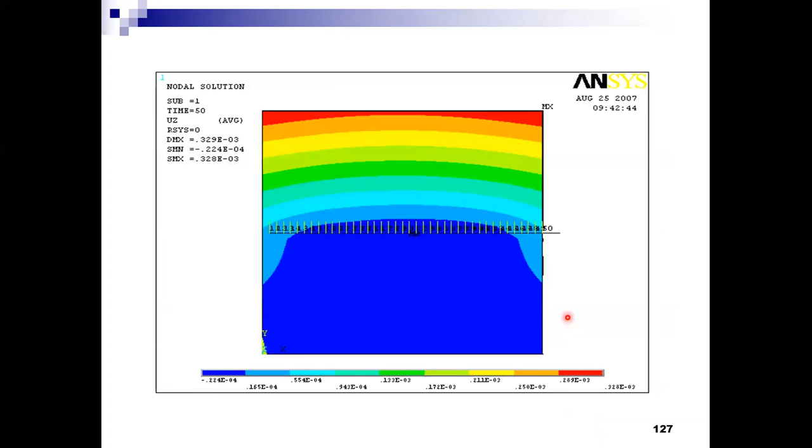This is the heat source model, and this is the displacement, the strain displacement. You see over here this sheet has got bended. Then finally, the sheet is clamped, so there is no displacement here, but the displacement is there. So this much angle we can measure, how much deformation. So each node we can measure the deflections.

So these are the laser forming process parameters: one is the energy parameter, laser power, feed rate means scanning speed, and laser beam spot diameter, number of scans. Material properties, the absorptivity means whenever you apply a heat source, how much of that heat source is converted to thermal energy. So absorptivity of the material also plays an important role. Thermal properties, then mechanical properties. So these are the things.

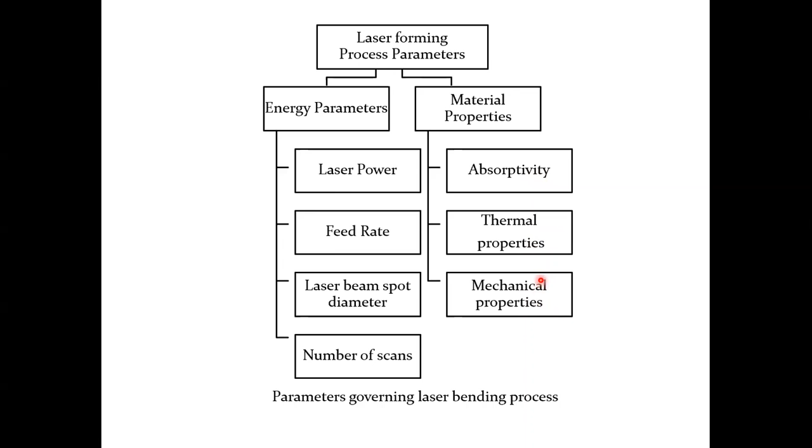Now, Abaqus is also used to analyze the deformation behavior in laser bending. The process work mainly includes the following steps: develop the geometry and define the material properties. First you define the geometry, then give the material properties, then define the boundary conditions. Then modeling of laser heat flux, which includes the heat flux intensity, beam diameter, scanning speed, and scanning path.

Then generate the appropriate mesh, then set the solution methodology. So these are the steps which are required in FEM analysis.

So here, these things we can do: thermal mechanical boundary condition, geometric modeling, material properties, given a FEM based transient thermal analysis, then find out the transient temperature distribution, then FEM based transient mechanical analysis. This process is called sequential analysis, meaning first you do the thermal, then the mechanical, then finally you get a result. If both are coupled, then you can say coupled thermomechanical analysis.

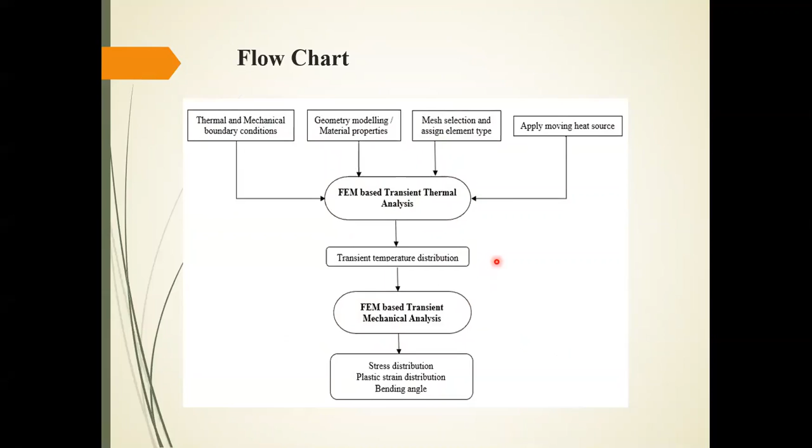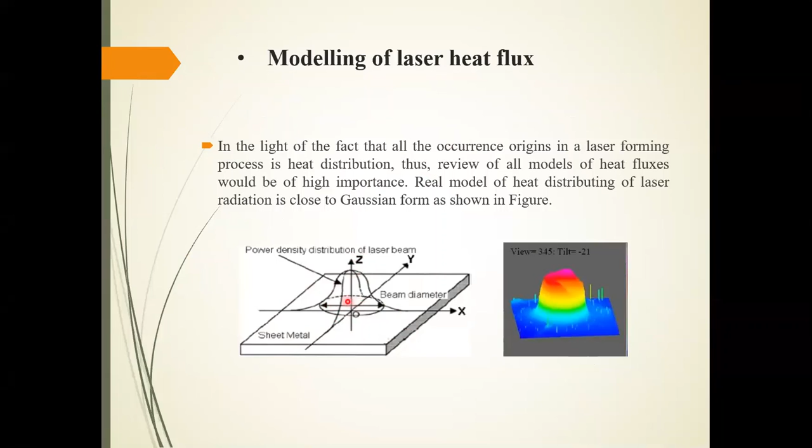So by reducing the number of elements, it directly impacts the computational time, so we can reduce it. Now, this is develop the geometry, define the mechanical properties, generate the mesh, we can mesh it, then modeling of heat flux, laser heat flux. So here Gaussian heat flux, the beam diameter, you can assume it Gaussian, then finally you get the results.

You can see over here, when the heat source is here, at this point the temperature is maximum, but when it reaches up to this region, the sheet got bended. See over here, initially no bending is taking place, but whenever the heat source moves from this point to this point, the bending is taking place. So the sheet got bended, this is what we need.

Then what about the stress distribution? Von Mises stress distribution, you get it, so this will give it. Then see, this much bending angle is there, so plastic strain will be there.

So more or less, every part you can get no plastic strain, but bending is taking place from this region only, that's why plastic strain is maximum at this region. See, but the sheet got bended, see over here, so this is the way. So it causes distortion in the scanned region, resulting in the worksheet bending, which can be observed in this picture.

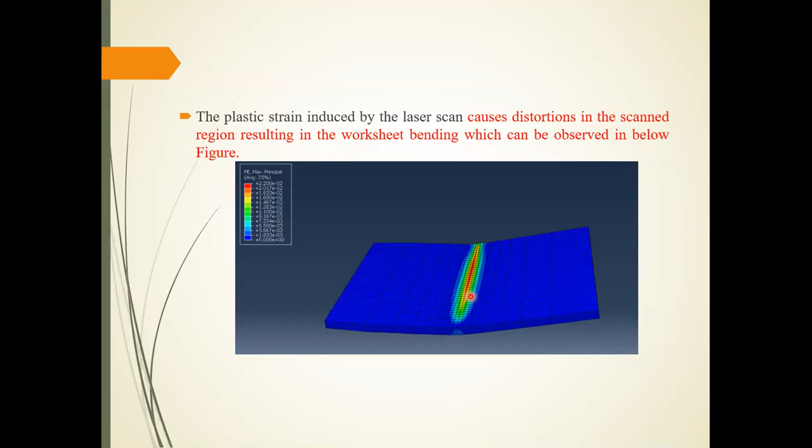Extract the figure from Abaqus or ANSYS to publish a paper. This process is also very much helpful to represent your results. So finally you get the sheet is bended. We have compared these results with experiments somebody has done, and by simulation also we get the same results.

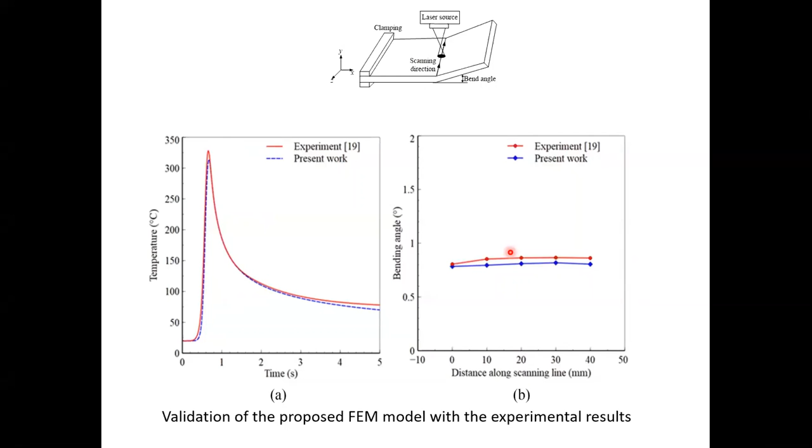So almost within 5% error we get it, which says that your simulation results are validated. Then we can do some parameter study also depending on things, and see temperature at point T1, point T, so heat source reaches here, then hits here. Corresponding, you see the sheet is also taking bending. Here no bending, here some partial bending. Finally see this temperature - these are the observations easily we can observe in the software, Abaqus. These are the results which contour plots will obtain.

So challenges and research status in laser forming: process modeling and optimization, study the metallurgical aspect. Still this area is blank - what microstructure changes take place by applying deformation?

Then study of irradiation strategies at which predefined path it is decided. Development of efficient and portable laser systems. Feedback control system also required for precise and control laser forming process. Development of coating - suppose you apply coating, then what about the material absorbability? These are the things that research people are doing.

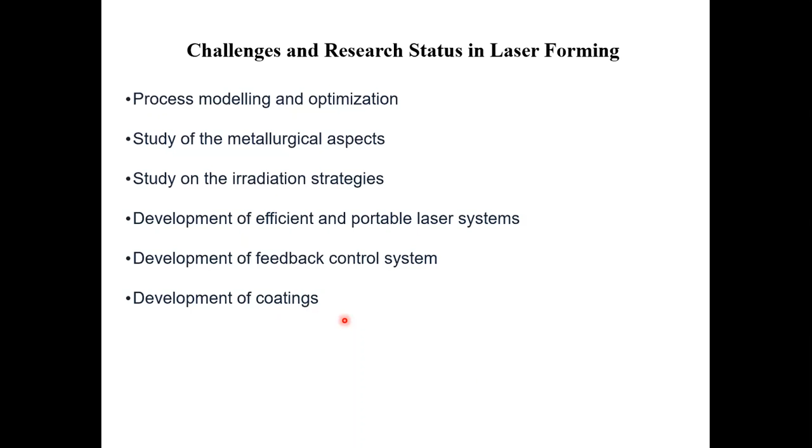And you see, this is the inverse laser bending process. Curvilinear laser bending, people have done work. Then multi-pass laser bending, people also doing laser assisted bending, means you apply a laser and apply a mechanical force. Then your results will be much better than the laser bending alone.

So forced cooling, because the heat transfer is there, then shape generation, then apply a soft computing technique, then optimization, then inverse analysis also, like in a rolling process we have discussed. Similar methodology can be employed in this process also.

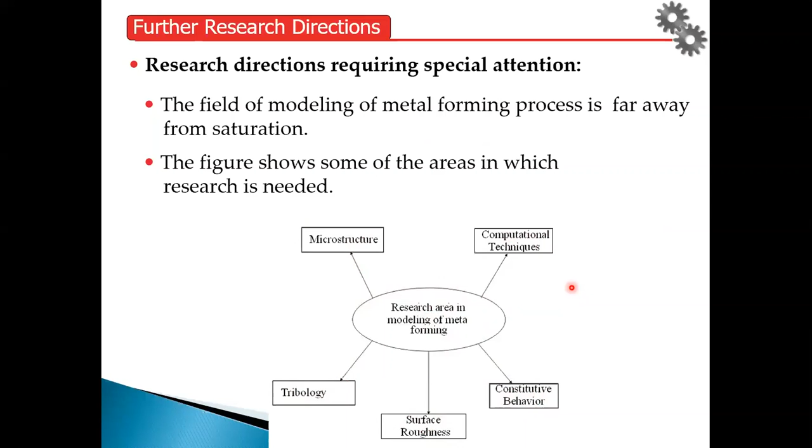In rolling research area in metal forming by FEM, computational techniques we can work in that. Then constitutive behavior, different material models. Then surface roughness - what about the surface roughness? Then tribology, friction related things, and microstructure. These are the things that research direction requires special attention.

These are the standard textbooks which I have referred related to FEM modeling and metal forming process. Thank you.